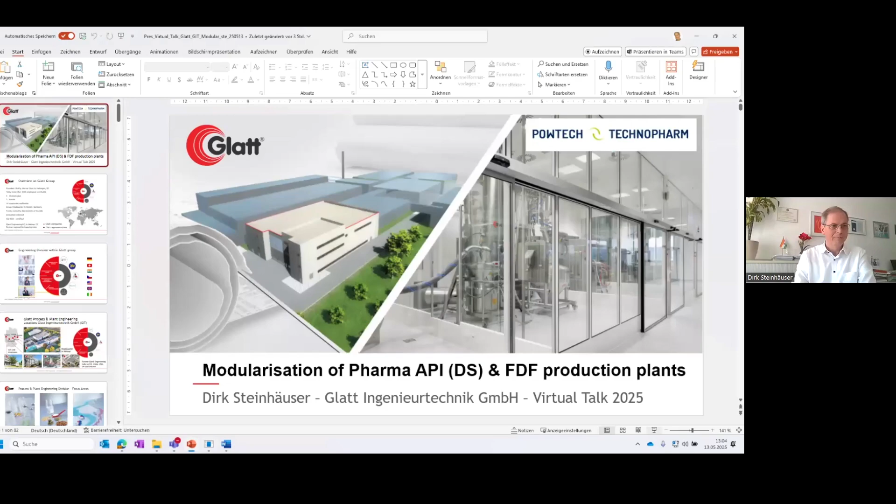Yes, my name is Dirk Steinhäuser. I'm Vice Head of the Dresden Engineering Hub of Glatt Engineering. I'm a process engineer by background, by profession, but I also have a scientific degree in biotechnology from a university in the UK.

First, I would like to give a short overview on Glatt Group and what we are doing. We are a group of about 3,000 people working in different companies in different countries and regions, and about 14 companies. We are from the engineering division, and our other divisions and branches are especially the equipment, but also pharmaceutical services for development and food, feed, fine chemicals.

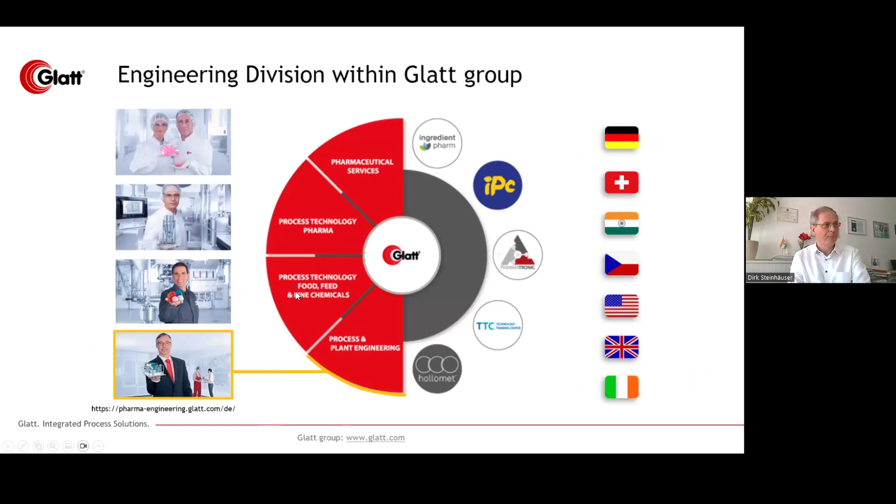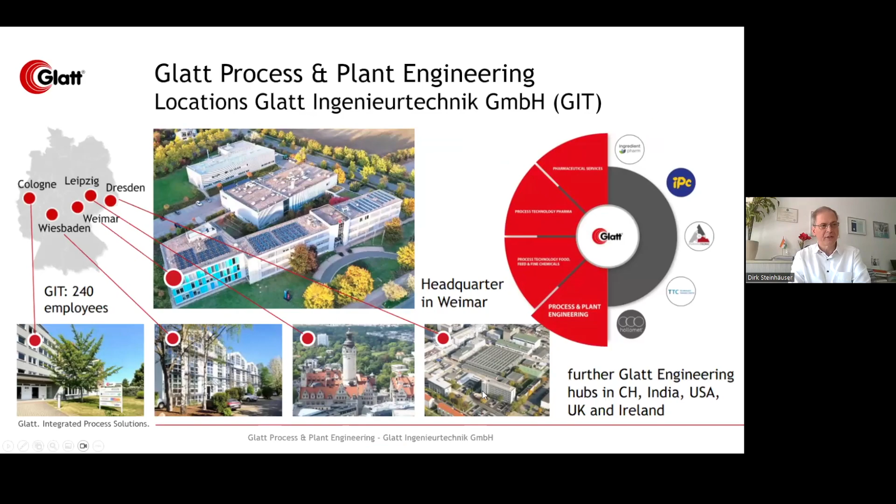From the engineering division here in Germany, we have a number of offices and hubs. The main hub is in Weimar, the headquarters, and I'm situated in the plant here in Dresden, in the office building where we have an engineering hub on the 5th floor. We are working on a number of topics in pharma, biotech, biopharma, as well as food, feed, fine chemicals, and also the chemical industry and certain fine chemicals.

Within pharma and bio, we are dealing of course with active substances, APIs, active pharmaceutical ingredients, both biotech and chemically, but also based on specialties or on special raw materials like blood plasma. And for the finished dosage forms, the FDF or the drug products, we are especially focused on solid dosage forms, but also liquid dosage forms, steriles, and certain specialties, medicinal products, applications, plasters, sprays, you name it. We have worked for a number of companies.

The approach that I'm going to show is derived and developed together with projects where we have developed and gained our experiences. Here are some examples. A company where we have done a lot of work is in Dessau, IDT Biologika. We have done projects for ATMPs, these are advanced therapy medicinal products, and vaccine projects here in Dresden for GSK.

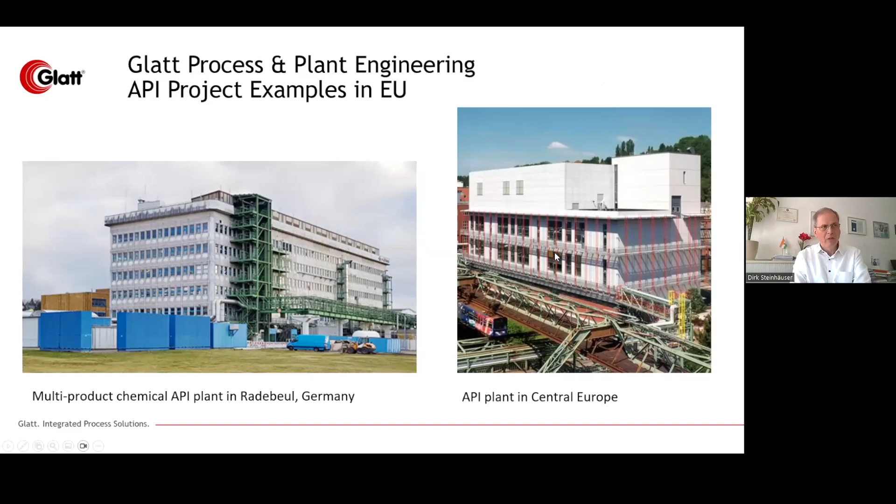But also API projects, for example, here in our valley of the River Elbe in Radebeul for Arevipharma, which was the former Hexal, now part of Yonsung Group from Korea. This is a plant in Germany, also an API plant with modular trains.

Sometimes the API plants have high requirements towards operator protection or product protection, so we apply containment. There are certain OEB, OEL definitions applied in the plants. And these kind of plants sometimes even are structured on the plant level into a modular approach.

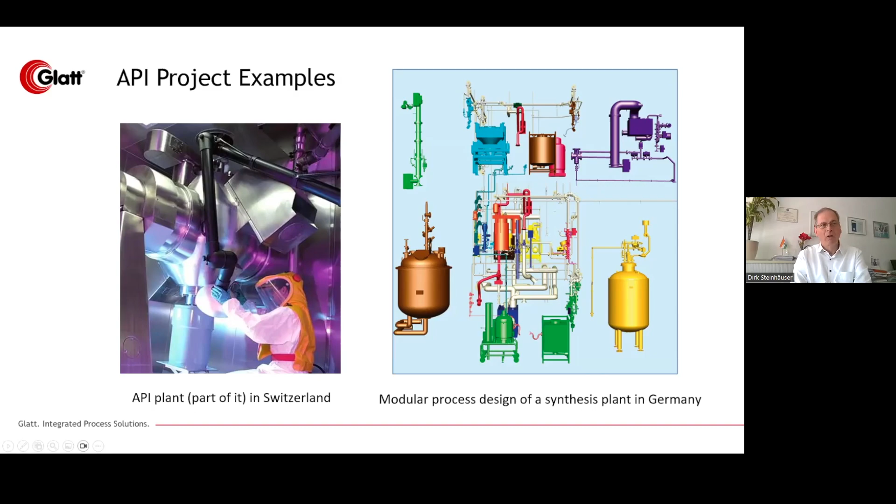So we have process flow diagrams and P&IDs for the different units of a complex plant step or plant unit, for example like a feeding station to a reactor, or condensers, or evaporators, or collection tanks. So all these kinds of process parts can be modularized.

Of course our travel was restricted, but the construction company was local, and it moved forward quickly. So already in '22, the building was constructed, and afterwards it started to fill in with equipment.

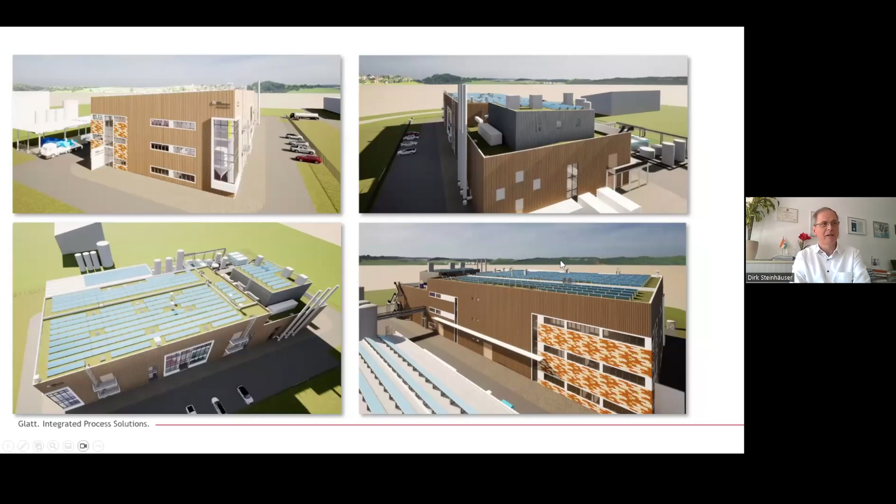Such a biotech campus, like here in Thailand, is also being built at the moment in Germany, in Straubing. This is an image of the conceptual design phase for the biocampus multipilot in Straubing, the ID phase, and then it was designed in concept and basic design. First equipment modeled in 3D, the piping, and then, of course, the building, the architecture, also with solar panels and some other sustainable energy modules.

And the first tool to coordinate these trades or disciplines is the layout, where everything comes together, because all of these disciplines have their space requirements.

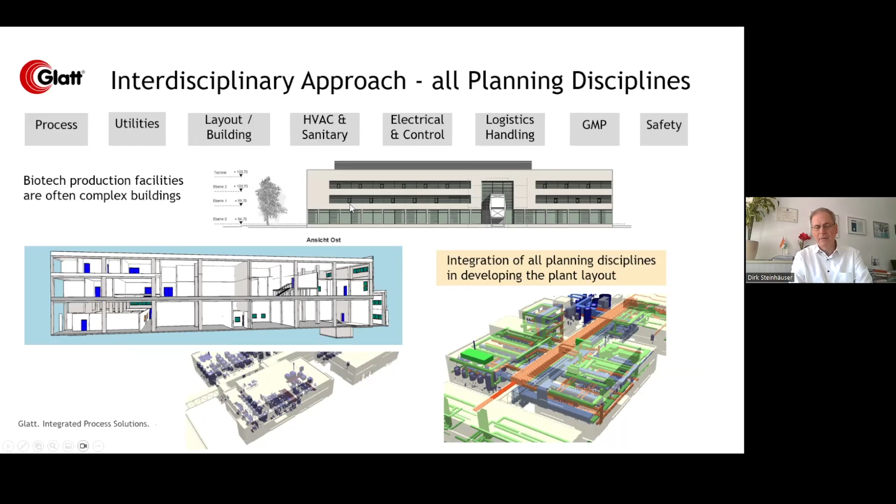And these projects go along in phases. Many of you know these project phases, like concept, basic, detail design, and then starting the procurement, and as soon as the building is constructed and equipment delivered, going further into construction management direction, and then the installation phase coming further to commissioning, and for pharma projects also qualification.

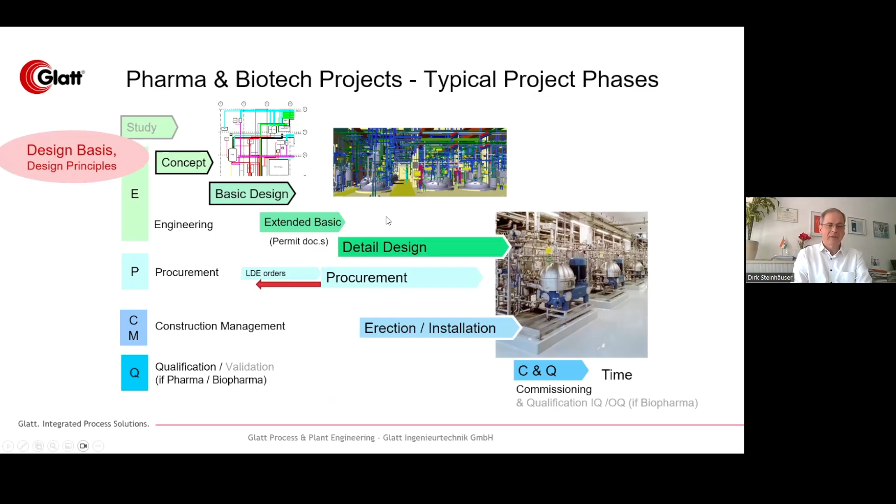However, the first starting point is always the design basis, the process or the process requirements, the defined process. And even if the process is defined, there are further design principles to be discussed, especially in the GMP pharma environment.

For example, the discussion, what is in a clean room, what is in a technical space, which classification of clean room is applied. So we discuss this very early, derive it from the GMP requirements, and then assign the classification to the function, and also discuss the function, collecting all these necessary steps, equipment, and support functions into a functional program. This is also the basis for the next step, which is later the room list.

And this is a method which comes from the ISPE organization. We didn't invent it, but we apply it a lot. And it helps also to structure a plan without a discussion of specific room sizes, because otherwise you end up in discussions about why is his room larger than mine, if it's an office or lab. And also the allocation of certain functions can be structured primarily based on technological aspects and GMP aspects.

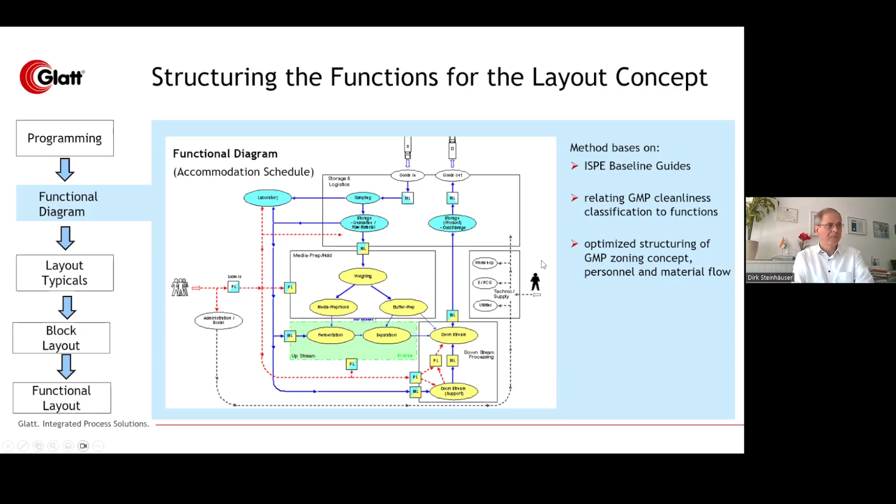With these functions, we also assign the necessary space for operation, maintenance, sampling, taking a sample, but also feeding of product or raw material, and the handling for that, like for example lifting devices, hoists, etc., heat exchangers, pumps. So all these units, all these systems require their space.

And so for a complex function, like this case, we have buffer prep and hold area, not only the two tanks, but also the periphery considered in the overall layout, typical, as we call it. So we have a library of all the functions we've come across, or that usually apply in such a project, and have them also in different volume or capacity ranges.

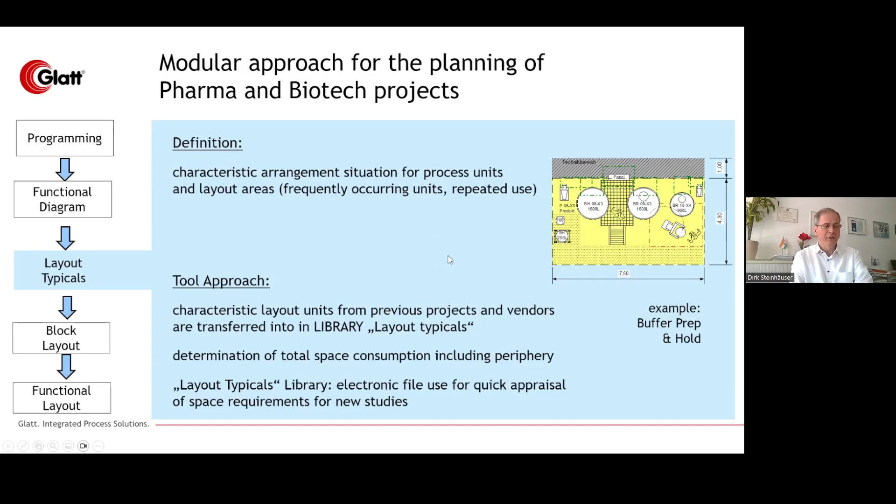With these blocks or ideal layouts, we can apply these for the different configurations of the layout. The first arrangement in horizontal and vertical way. Also, there's technical spaces, what are the spaces and the dimensions. This is still very conceptual, very preliminary, but it gives the first indication and a structure into the layout development.

With these blocks, behind that are the details. So this is a bit simplified, and behind there are the details. So it's really proven within the detailed drawing that these measurements are kind of realistic.

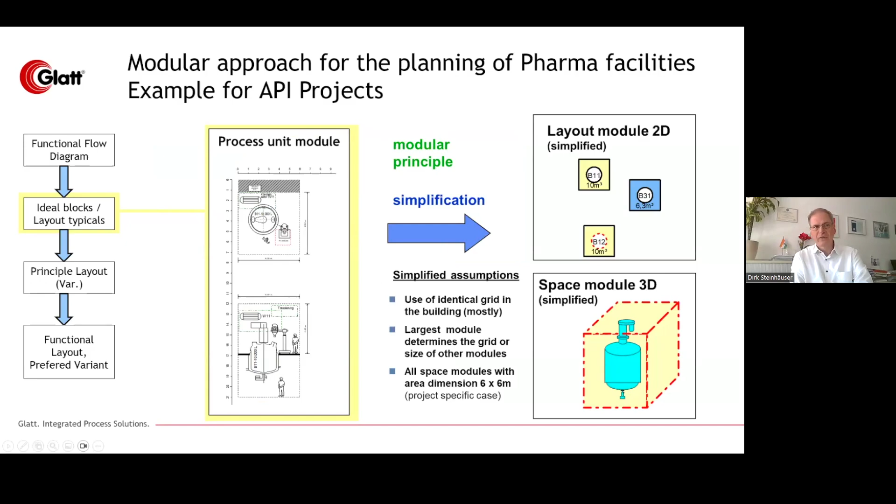We can apply these in layouts in a 2D plan like in Visio, but also have a simplified 3D model, a modular space module. So to have a structure, for example, for an API plant where we have technical spaces, where we have a kind of middle corridor for some functional units. This might be open space, but you have certain reactors left and right-hand side, and this can be accessed, and then cooling or heating media can be connected to the technical shaft or area.

And with these kind of cubes, it can be played around with or structured in the way like it is symbolized here, even if there are questions like free modules or modules for extension.

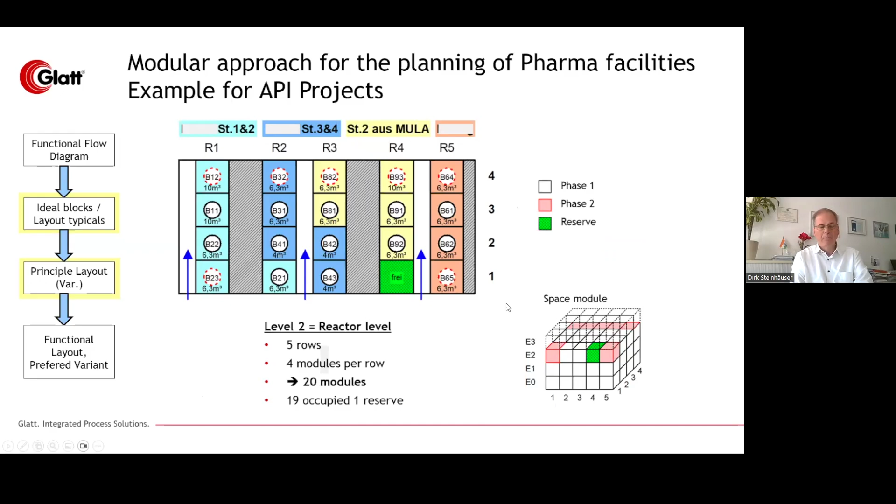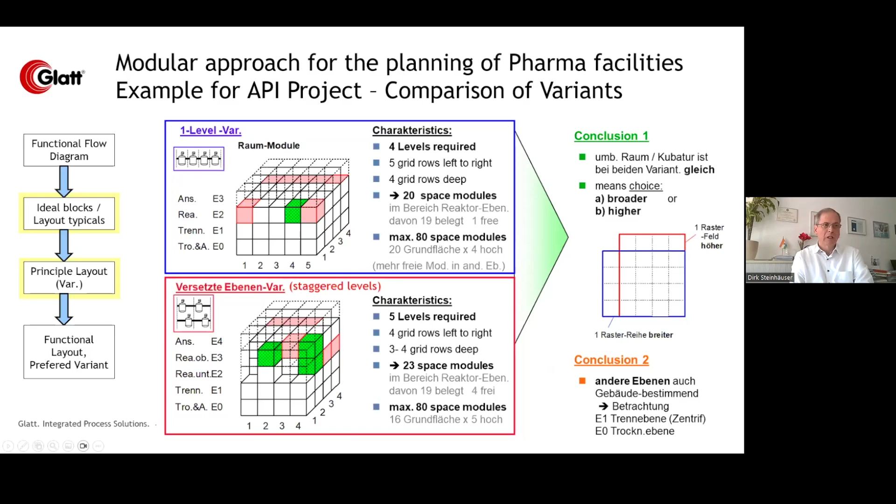It gives a good tool set to discuss and develop arrangement levels, like how many floor levels, how many grid levels in the horizontal perspective. And then we can also compare variants where we have different configurations, a staggered approach, or one main reactor level. And if you have to consider certain requirements or constraints from the construction or from the land plot, then we can also model these or play around with the different variants.

Then this goes further into a layout section, first a block layout section. Here we see already the different levels of an API plant. Above there might be some ventilation technology, even purification or recovery. And then some process feeding, the reactor level already in a different clean room classification, going down further into separation of crystals, and then drying and, for example, filling or feeding of containers for further bulk processing or storage.

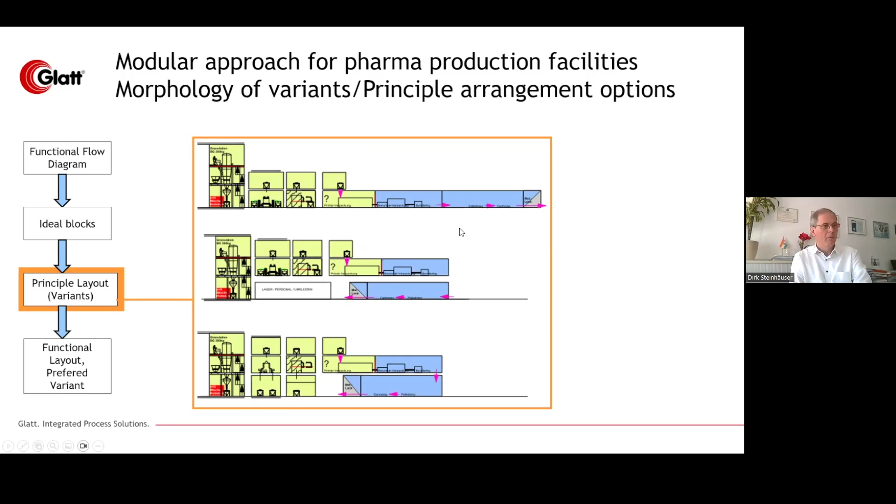In oral solid dosage forms, here we see a granulator type in a vertical arrangement, and then the following steps like tabletting, sometimes coating of tablets, packaging, and then secondary packaging, which is the cartoning. And the different scenarios can be modeled, and advantages and disadvantages can be discussed using this approach. This will be detailed out further from the principal layout into a functional layout.

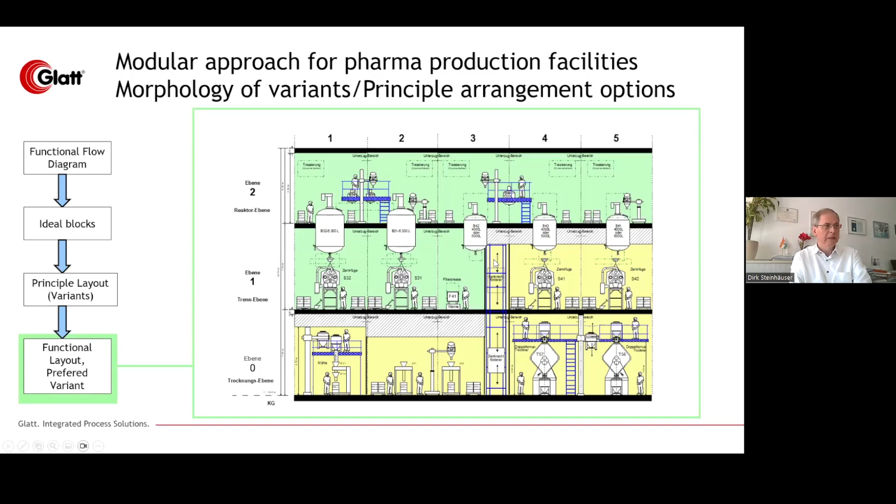So we see these more detailed drawings. This already can be at the end of the concept design. And just to indicate the depth of the equipment, we have certain filter centrifuges or double cone dryers here in vertical, but also in the horizontal perspective.

For OSDs, we have also developed train concepts that go beyond one module, considering the neighboring modules like dispensing or tableting, and even further to packaging. This is an example of a one product dedicated line, so straight one line for one product. However, there are other train concepts combining two trains into a hybrid train, so we can have more than one product.

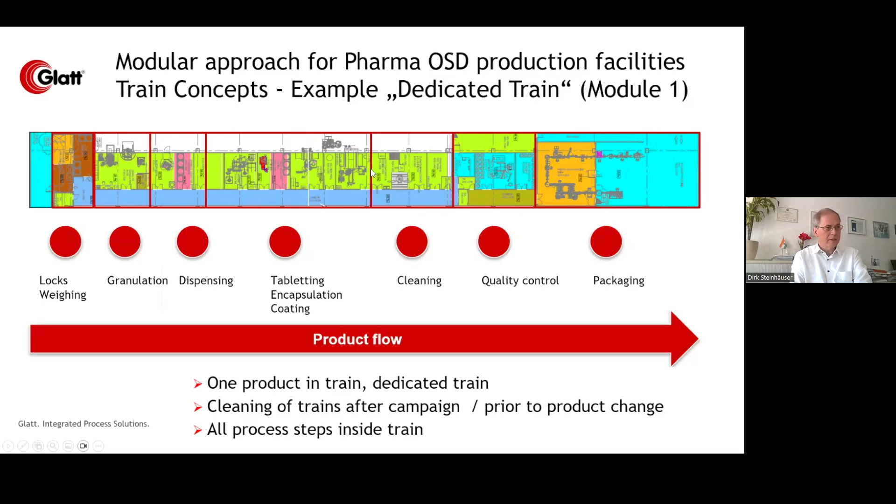At the same time, we can use the different stations in a workshop principle, going to the station. And for a mono plant, of course, this is the preferred way for one product, or if you are in campaign operation mode, changing after a few days or weeks, then do proper cleaning and go there with the next product. You can run more products at the same time. And there are combinations of up to 5 train concepts we have developed and are using.

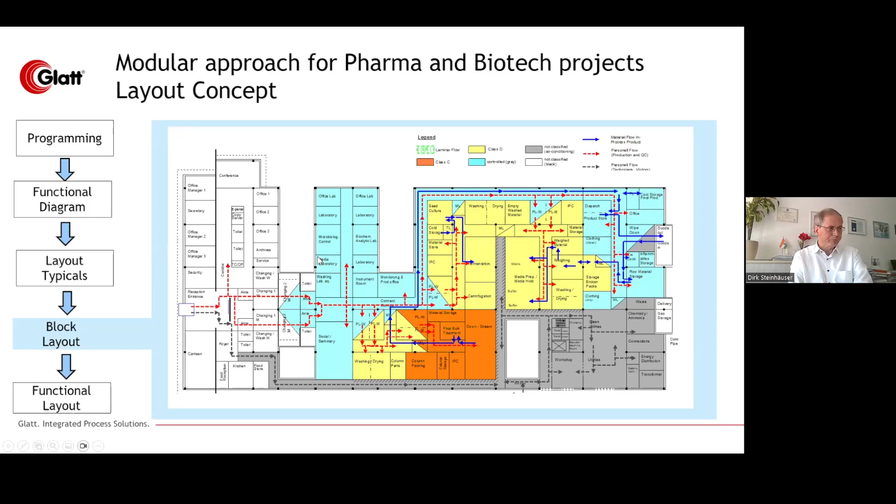These train modules are all combined together in block layouts. Here without equipment shown, but behind is the equipment information from the modules in more depth. So there is a safe space estimate underlying this design concept. Nowadays, luckily, in the past 5 or 6 years, the equipment suppliers also provide us with 3D models of their equipment. So we're getting such 3D models from nice companies like Pall or Millipore or Sartorius. And of course, we have a high planning certainty for the layout design when we receive such models, and we are quite realistic about the final selection by the customer for the project.

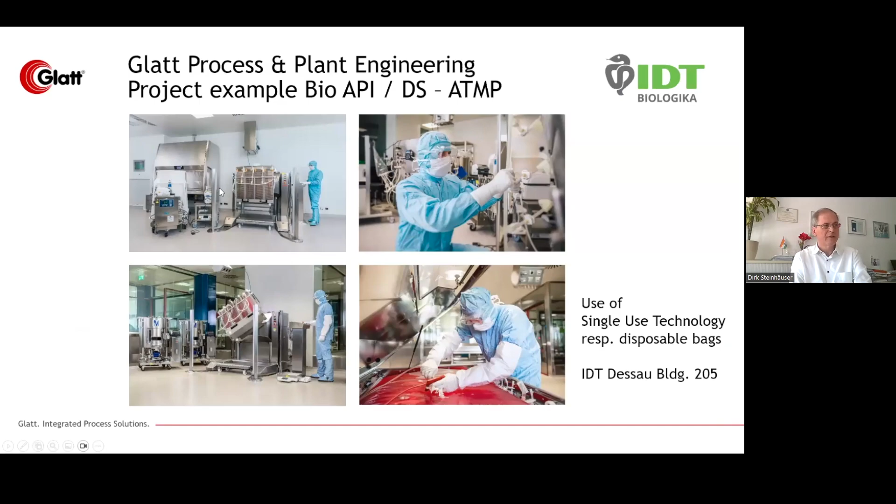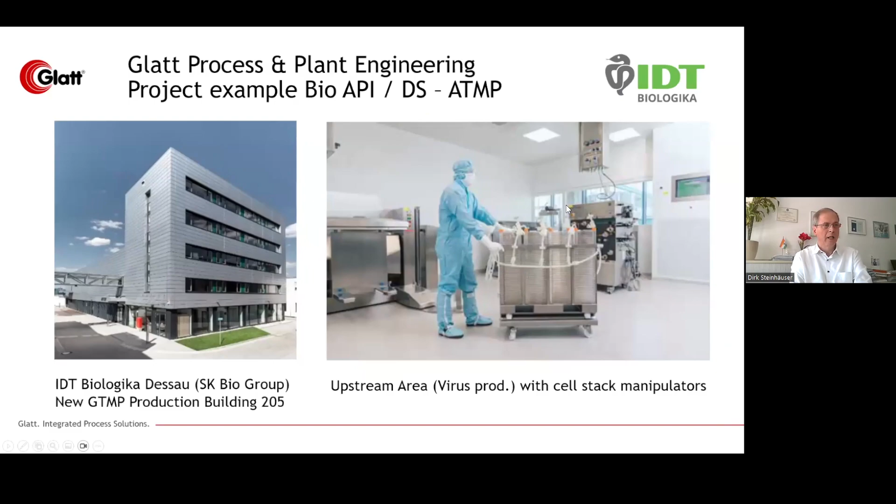And here are some examples of single-use technology in a fermentation plant, in the model and in reality, in this case a project case study from IDT Biologika in Dessau, where we have special equipment like cell stack manipulators applied. Utilities are supplied from above to the mobile units, quite flexible. It's a building concept developed together with an architect partner, PBM Group from Leipzig.

We have flexibility within these main production compartments, 1, 2, 3, 4. Each one has its own personnel and material airlocks, so there can be different products in the modules. Usually 1 or 2 of the modules are applied for upstream and the others for downstream, and different classification is possible. Of course, the final step is mostly the higher classification. Depending very much on the organism or the process, it doesn't necessarily mean that we have to run them in class B, but it is designed to be able to have class B. That is the darker blue color here.

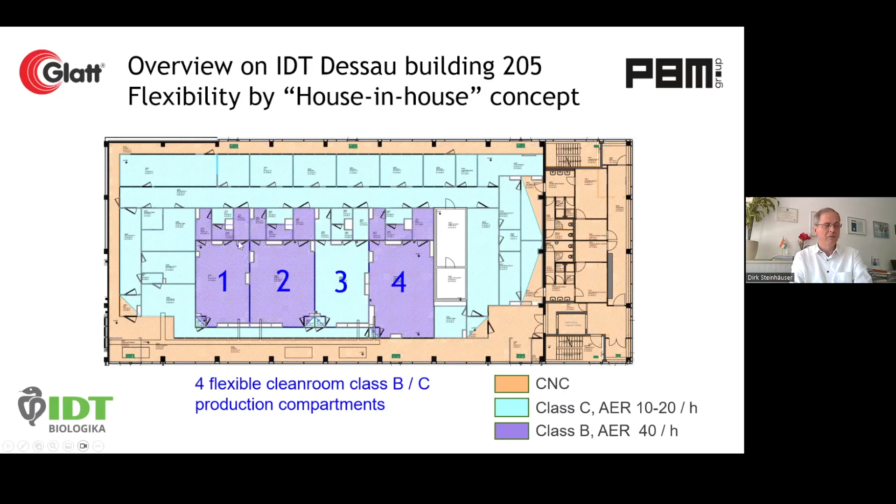There's a second level of flexibility: even if we apply different products to the production modules, the whole floor can be changed. In the clean room part, the clean rooms can easily be changed because the building structure is not affected; it's independent, a wide span structural unit. Air handling units are on this technical level, can be repositioned and moved easily, and give another level of flexibility to the plant. IDT is a contract manufacturer, so they quite often face a change of customers for whom they are contract developing or contract manufacturing. So this customer is provided with such flexibility for their plant.

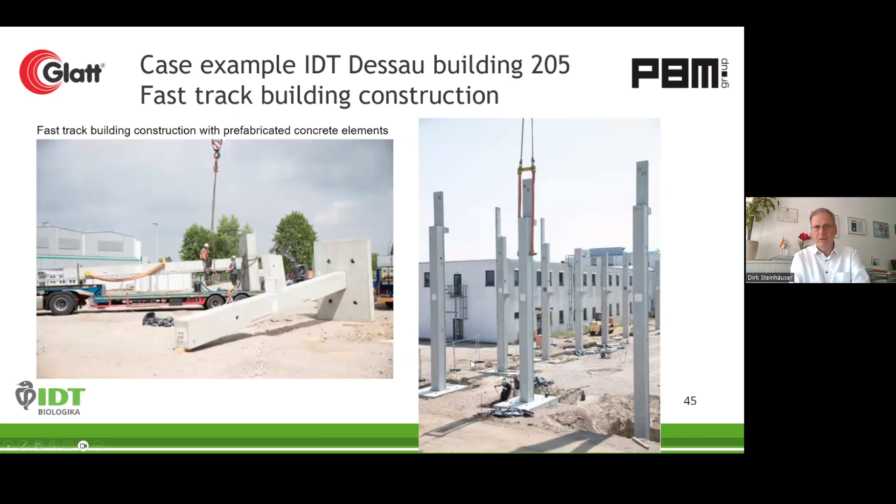And oftentimes it is of major importance. This is from this IDT project with a fast track approach. That means in this case a lot of prefabrication of columns and slabs. So these are delivered, prefabricated, and within hours erected into a vertical position. And within 2 days, the whole building more or less was ready.

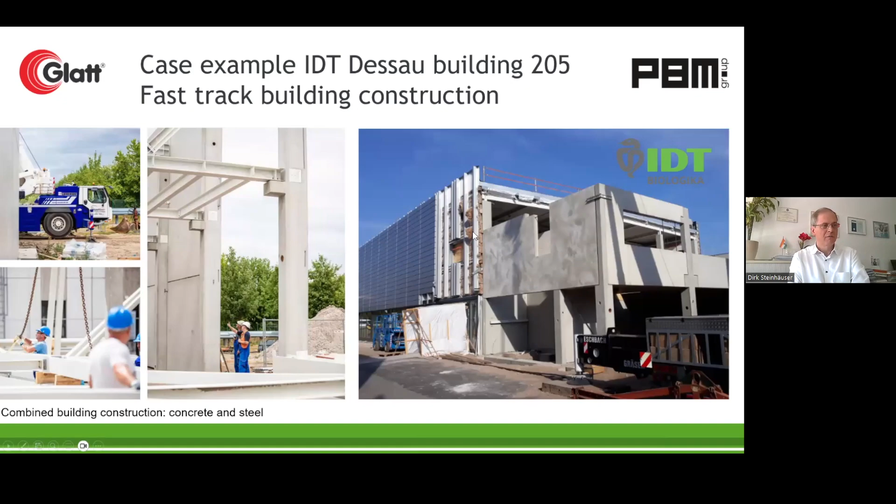And then here in the rear part already the facade is installed or attached. And then the front part is still the raw construction. So that is very fast building. And here is including the levels which are partly steel construction. And then already starting the work for the clean room ceilings and the clean room floors.

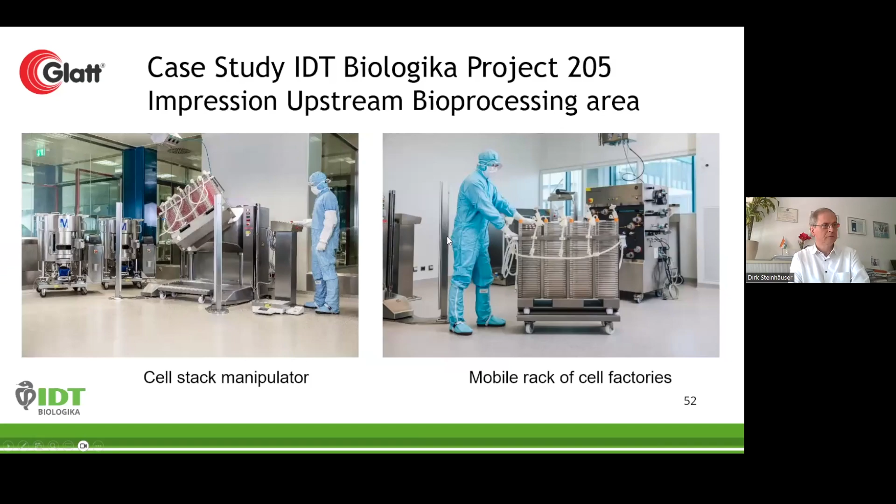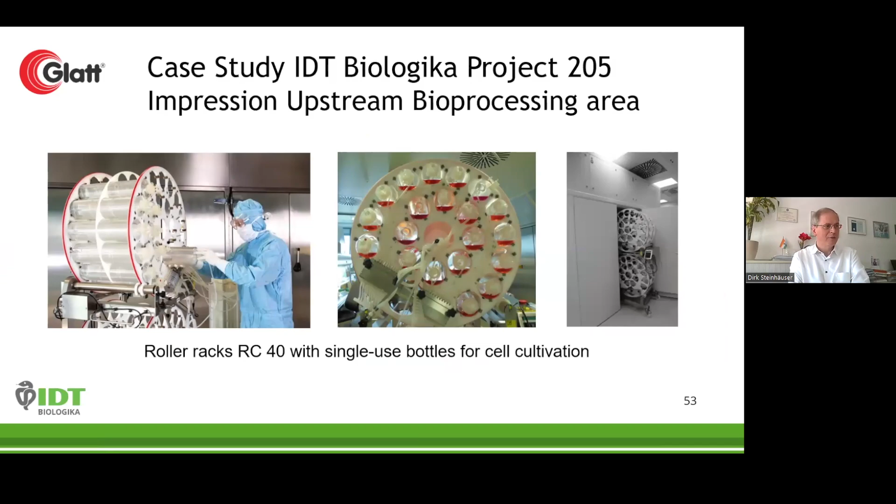HVAC level in this flexible structure that I've shown before. And then after that's prepared, then soon the equipment can be moved in. Yeah, and we have also very nice equipment like these roller racks here for the cultivation of virus cells.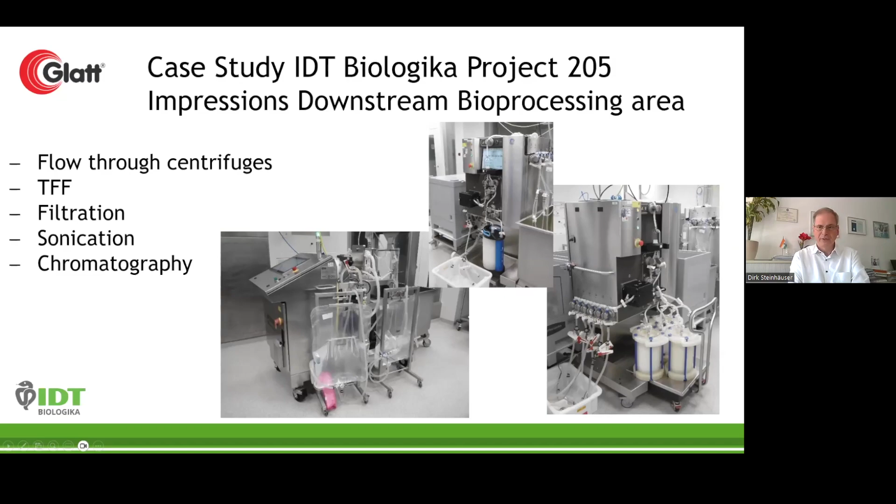Single use, not only for chromatography fluids like buffers or certain eluate containers, but also chromatography columns in single-use manner. One has to be a little bit careful when handling these. Sometimes there are probes and certain small pieces that are kind of measurement devices that are not single-use. So be careful when putting everything to the autoclave. Afterwards, they might be dead. So a very good training is essential to use these tools here.

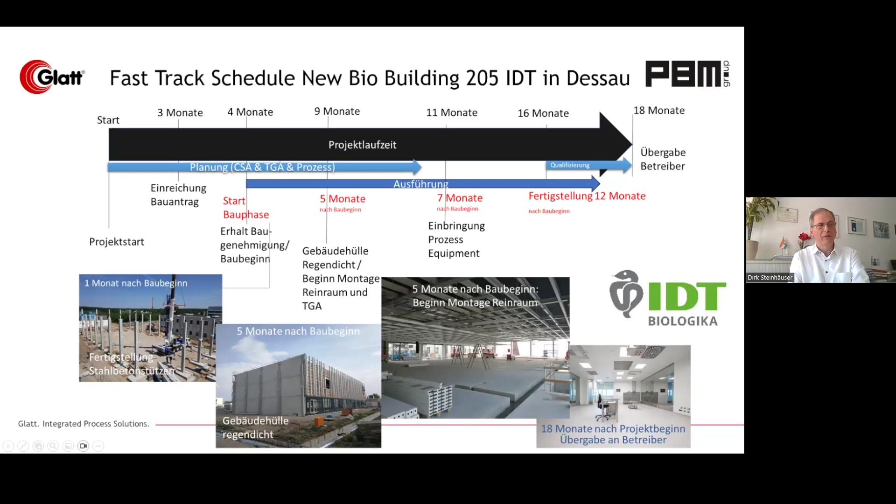The main structure was there, and the building was closed, and then the clean room installation started immediately. So overall, the building construction time was like 12 months, and the overall time until end of the qualification, end of OQ, was 18 months, 1.5 years.

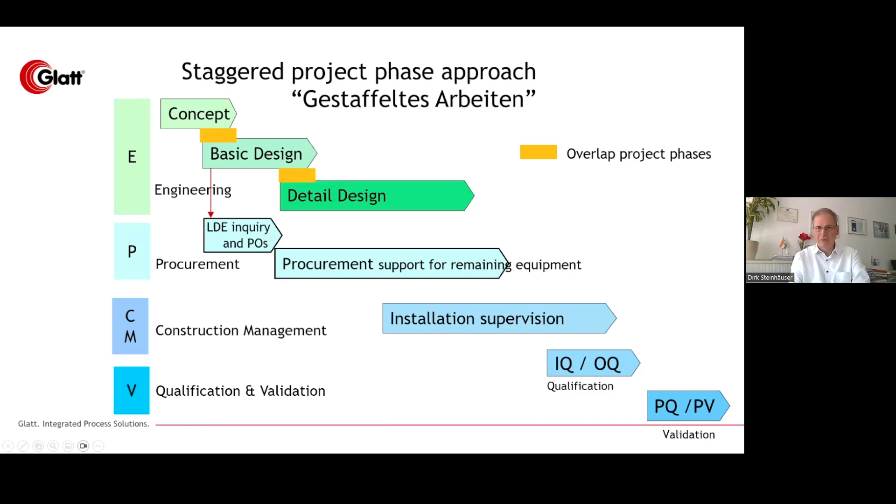For this kind of approach, it's crucial to allow an overlap of phases or a staggered approach, and further also to use the time, at little risk, to already do design work or prepare tender documents during the detail engineering, or while the authorities are checking, to use that time for continuing with the project, not just await the decision on the permit, just to continue.

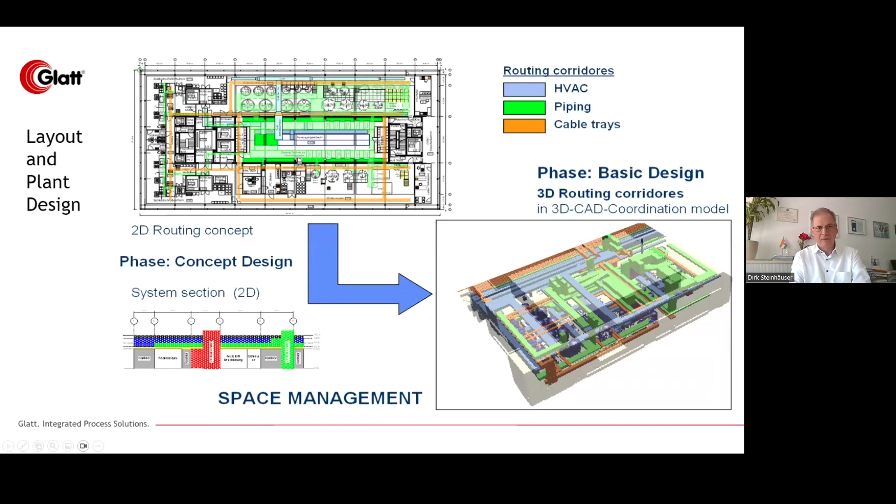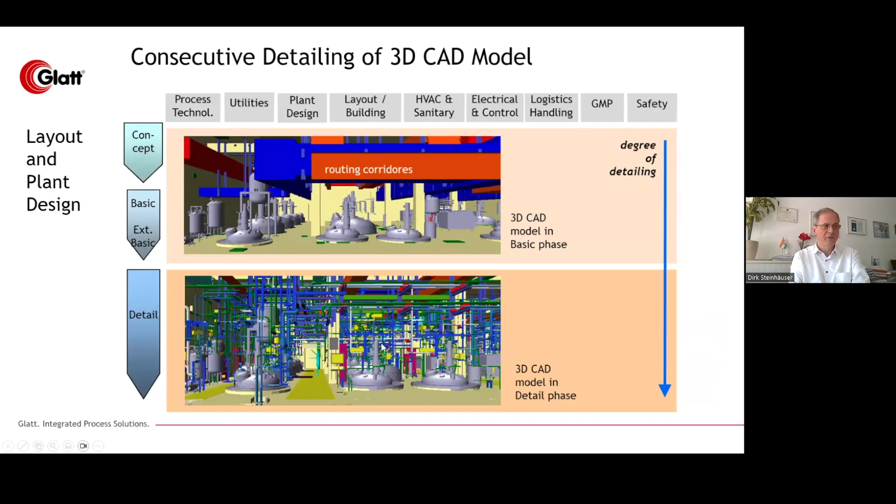Going further in the coordination in 3D from the concept with tools that we have in the basic design, usually Revit for HVAC and the main piping, and then going from basic design, from routing corridors, space reserves, into the detailed engineering, each pipe support, insulation, and further details, instruments, valves, everything. And then the overall plant is kind of designed.

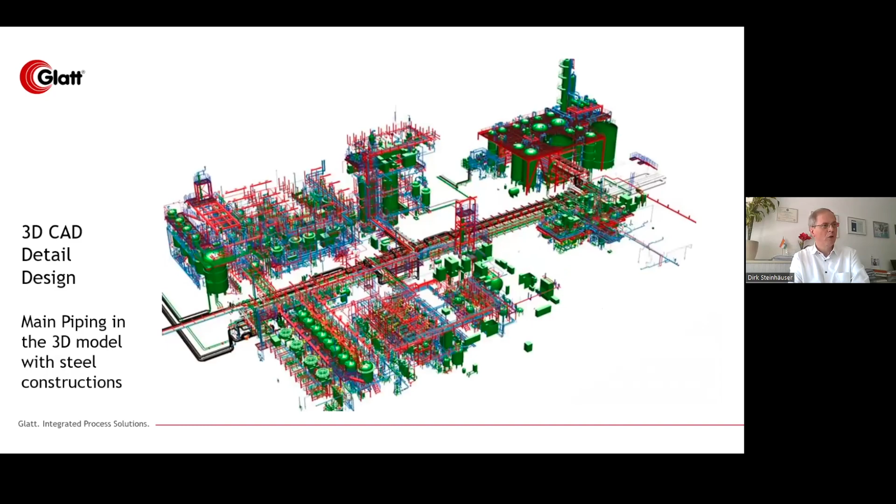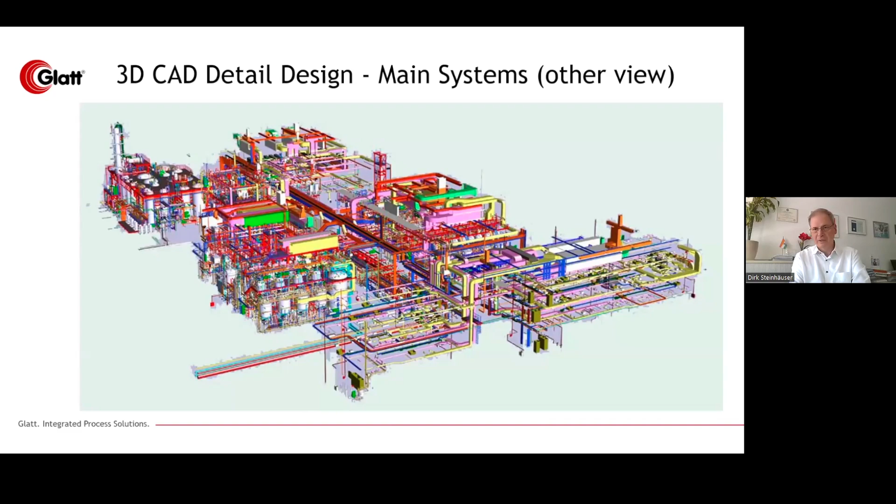So it is quite a task for coordination, and nowadays that's only done in a 3D model. Otherwise, to do that on the side would be time consuming and risk a lot of errors. Yeah, the Autodesk product group, AutoCAD and Revit, is the main tool platform we are using, but we have used also other tools. But in the last years, Revit has become more and more the tool of choice, also for customers or partners in building design and building construction.

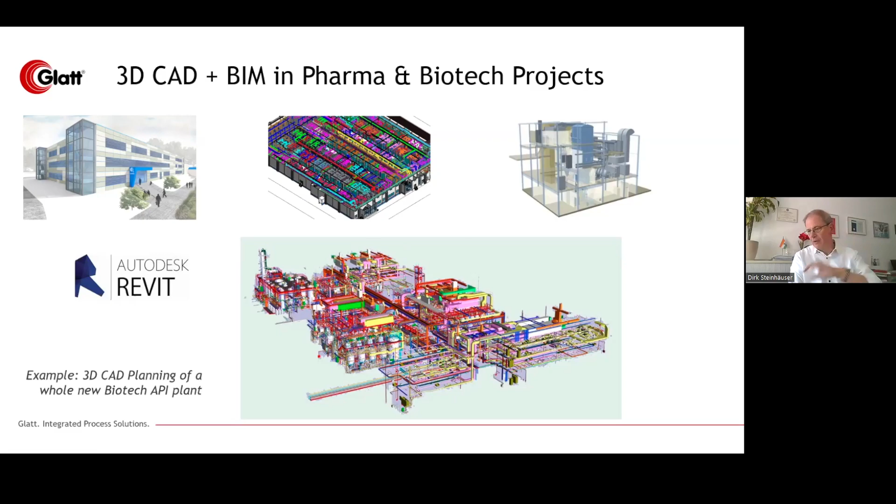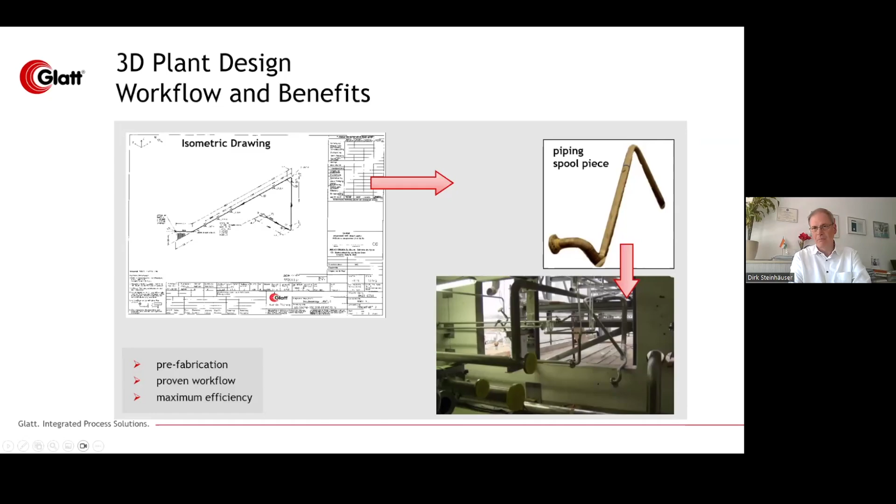And the MEP, in German TGA, for process, we to some extent use AutoCAD Plant 3D because of certain features we use for sloping and isometric drawings we generate from the model, material takeoff, material lists, etc., which go directly to prefabrication of spool pieces, and then these are labeled, and the operator or installation worker can take it on the shoulder, bring it to the right position. So it's a bit like Lego, putting it into place, and then the plant is ready.

This is from the biotech plant in Germany, which has about 100,000 liters capacity for the fermenter and the whole tank. And here we have a larger plant in India. That's an E. coli plant on the left side, India. That's a yeast plant, yeast-based fermentation with 350,000 liters. In this case, also the fermenters were built by Glatt, our colleagues in India, workshop in Pune.

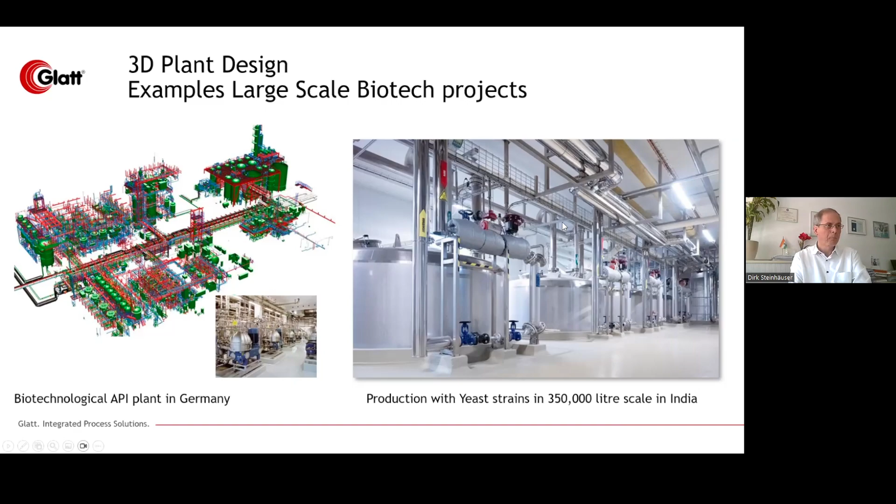And behind that approach is the interdisciplinary phase model, where we have the different disciplines. All the workflow is defined, the process, the sequence of the events, so that nobody is forgotten. The space requirements of every discipline are considered, respected, and integrated.

And for the modular approach, we have here the levels. Level 1, the base level, is the single individual equipment. Combining functions brings us to level 2, a complex functional unit, where we have a granulation function, not only with the granulator, but all its periphery. And we have level 3, where such functional units are combined into a larger functional area, a complete tabletting area or complete OSD area.

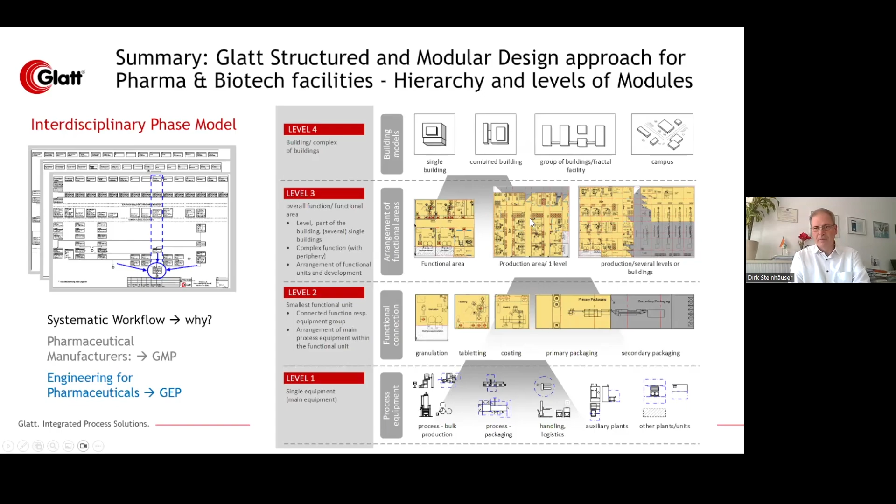And these functions can be combined into different building configurations, often together with an architect for the specific site and land plot, or if it's an existing plant, to the constraints and conditions there. For the modular approach, there is a method from Dechema, VDI, GVC, a German organization. There's a white paper. We have been actively using that and contributing here.

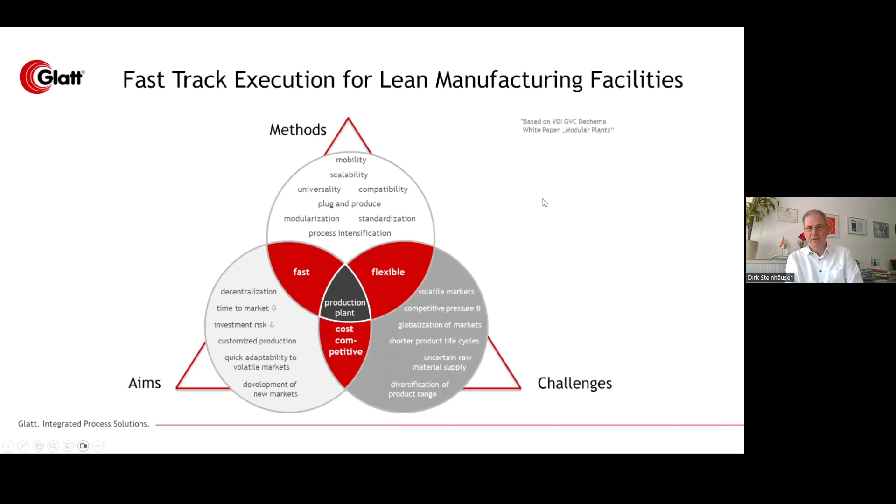So there is a method, and often it's this combination of being flexible, cost competitive and fast, and a number of aspects play a role, like time to market, being fast, being flexible, plug and produce, exchange, having new products. So all this together shall be considered. And with the modular approach, it's much easier because you can change a module or update a process rather easily.

Just a few conclusions coming from the requirements. There are a lot of product changes after the pandemic. There was the trend of anti-obesity drugs, or still is. There is advanced therapy, personalized medicine, new peptides, oligonucleotides. All these products want to be installed, and sometimes our customers, contract manufacturers or pharmaceutical companies, change often, have new technologies, new products, go to different regions, sometimes leave a region for cost or market strategy reasons.

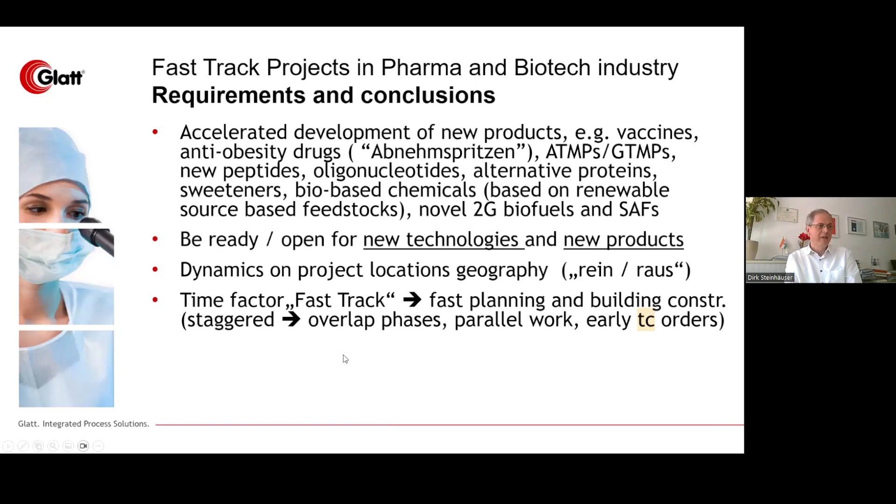And we have to follow that and act flexibly and quickly, and also order equipment quickly. But nowadays, it's not just equipment which has long delivery times. Sometimes there are so-called time-critical orders, even transformers or certain valves with special metals or alloys. And all this needs to be considered, as well as the cost aspect.

We try to involve, if it's necessary or recommendable, our engineering partner, Glatt India Engineering in Pune, and a lot in 3D tools, but now 3D becomes more and more BIM, building information modeling. We are using AI in certain projects. We apply robots in production, but also in manufacturing of equipment and skids. So this is the situation.

The biologization of products is coming. Less and less chemical APIs, although they will remain. There are always a lot of new biological products, and everything is now data covered. A lot of data are collected and generated. So all these famous words, big data, AI, are our reality, with the pharmaceutical dosage forms, with the registration, with the project, with the digital twin of the whole plant.

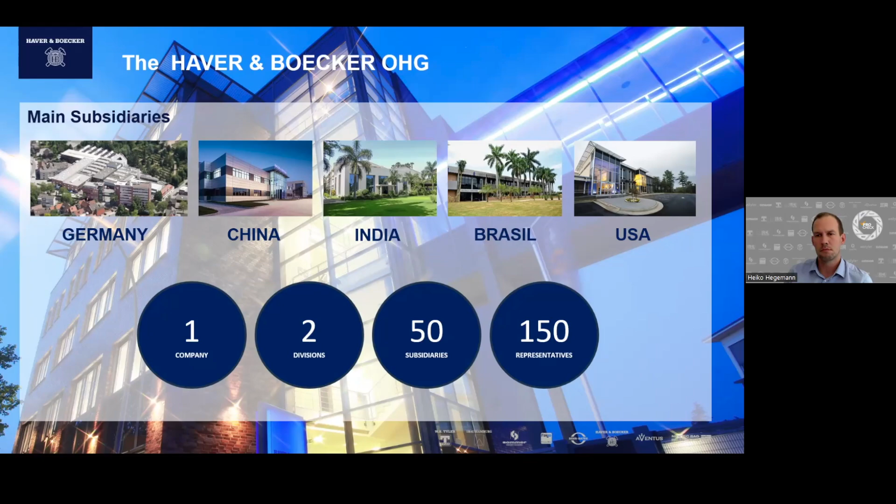So how do we do that? How do we listen to the customers? It's our aim to truly understand them in order to be able to advise and to supply them in the best way. Therefore, we developed the project cycle. That project cycle is based on 8 different segments, and these 8 different segments are used to cover all of the customer topics and answers. Today I've picked 3 of them to explain them more in detail and to show you this procedure.

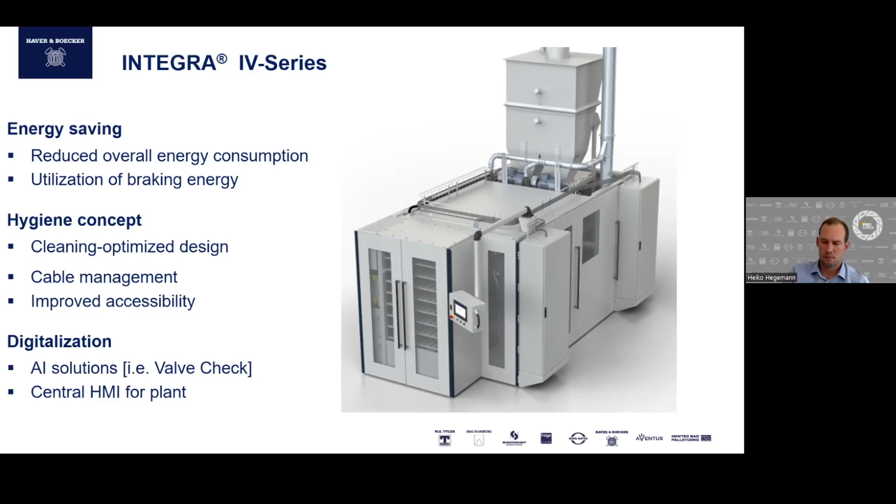Also a modular item, the new Amicus robot. Modularity in the way that we have multiple tools and different tasks for the same robot. So we are coming from the empty bag up to the palletized pallet of filled bags. The same robot could either handle the empty bags to load them into such a bagging machine or receive the filled bags, for example the 25 kg cement bags you know from the Home Depot, to palletize them on a wooden pallet. Therefore, we have different tools. It's the modularity to choose them according to your specification and your needs.

In the same way, we have the digitalization in that we use AI solutions as a bag check. These empty bags are mostly pre-printed with a product name, and the solution could help us avoid an operator loading the wrong bag for the different material.

Same here, we have the centralized HMI. You could choose where you would like to control your line or your plant and have there the accessibility to all of the different segments.

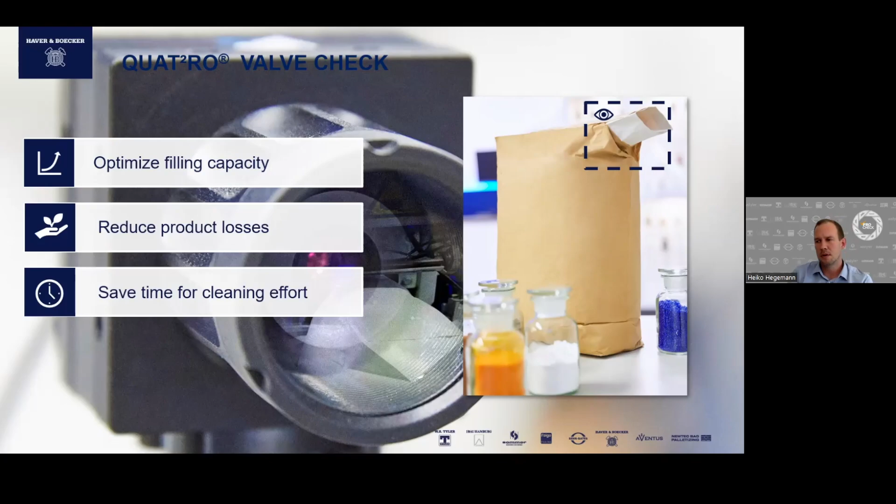This, as a benefit, optimizes the filling capacity. No operator intervention is needed. We have a reduction of product losses, because if the bag is slightly misplaced, the filling could still start and we have a kind of mess inside the machine. But with this solution, we completely avoid such a thing, which ends up saving time for cleaning effort and also saves time for the operator.

Second thing we have for the Amicus robot is the QUAT²RO bag check. See here in the picture such a bag - the AI camera will recognize the imprint of the bag and compare it with the given example print, informing the operator if this is not the correct bag for the product you would like to produce.

This saves time and minimizes the risk of any claims from end customers. We have reliability because we are not using the wrong bag instead of the correct one in the first approach.

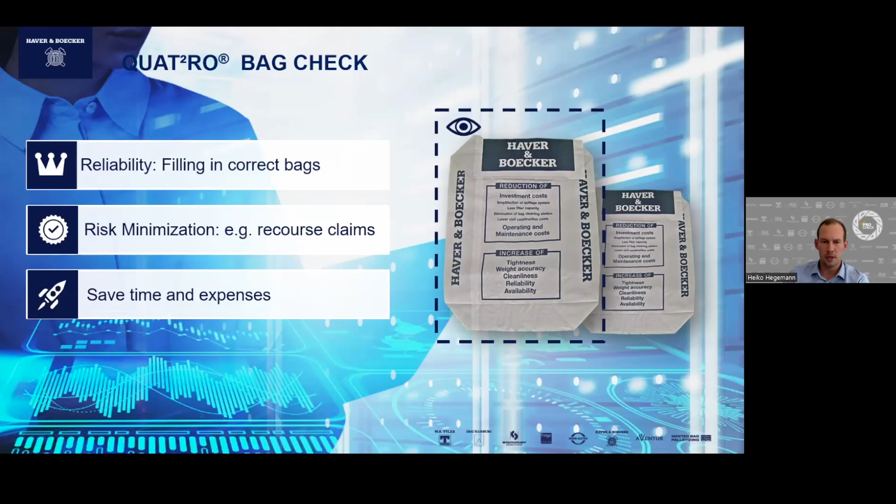Third segment, the plants and systems. It's the topic of combining the single machines, the single solutions, into one complete solution for your requirement. Now we have single modules, and these single modules could be combined to have the final product. This project segment is used to get a holistic solution for your business.

How do we do that? We have different QUAT²RO products. QUAT²RO is our digitalization branch, the family of all these digital versions to optimize your plant. We will get back to that later.

Mostly the big question is how you have a standardized, but still modular, approach to combine all of these steps. How is the paperwork done with the customers together to select from the prepared solutions and get them into a kind of order, a package which is needed by the customer. For this, we use our CTO system.

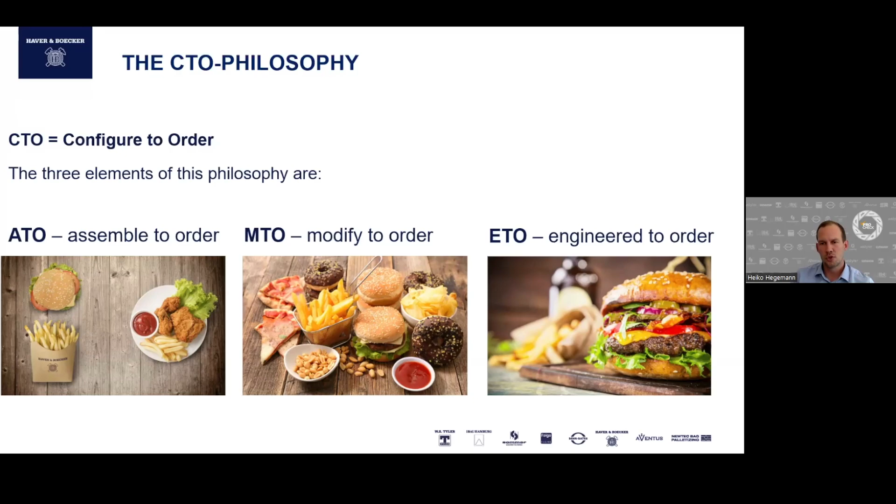How to integrate that? It's always the topic, the aim, talking about Industry 4.0, digitalization or automation, how to really execute this, and how to make all the information, all the data, available at the right point.

For this, I would show you what we have here before. On the right-hand side, we see our Integra bagging machine. This one is producing, for example, 25 kilogram paper bags. They are moved out onto a belt checkweigher. We have here a metal detector to detect if there is any kind of metal inside the bag, a printing engine to print on the bags, and our robot cell, the Amicus, to get the bags palletized on the pallet.

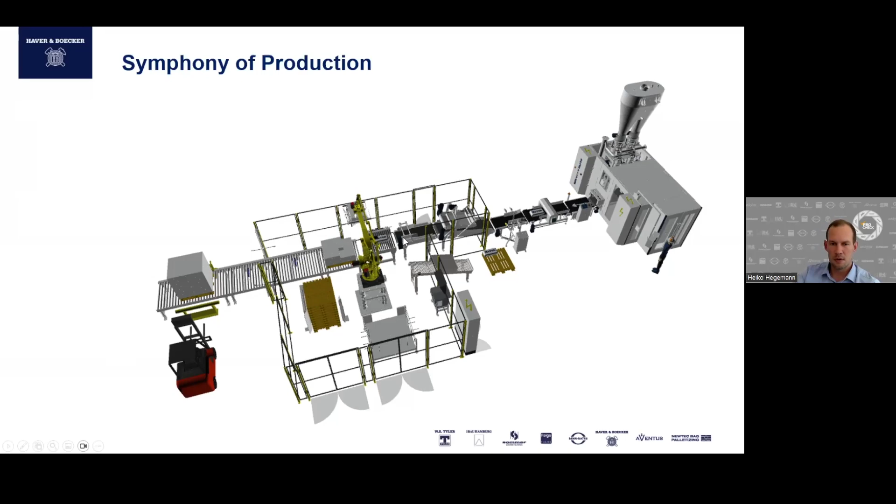The integration, first of all, for us is to use the H&B machine network to get the necessary information to fulfill the first phase, to have a productive plant together. Therefore, we have our main switch cabinet to do the distribution and to do more or less the central station to combine all of this information.

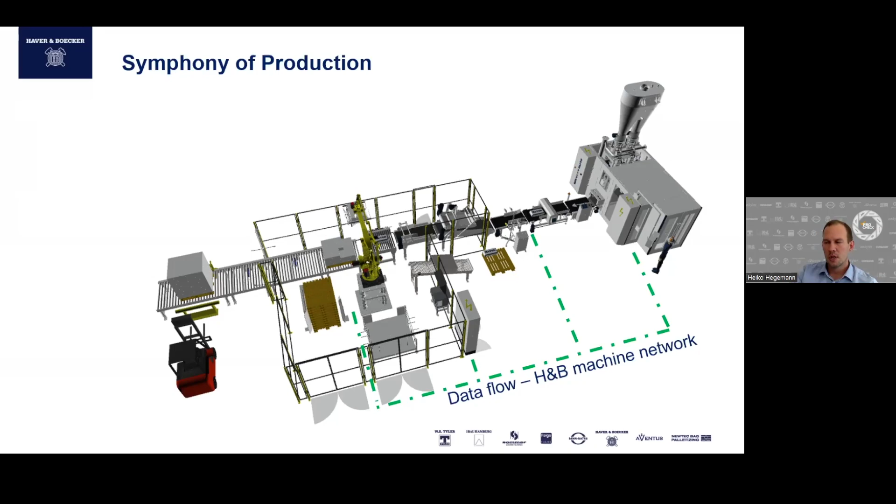Now we would like to add some of our QUAT²RO product family products. Then we do a composition of the local network along with the control network. That control network allows us to have access to the centralized station where the information is gathered, to collect them.

And to make them usable in our QUAT²RO products. By doing this, to have access to the centralized information, we could also use mobile devices or any kind of input devices to allow the operators to always have insight or to have a look on the dashboards to see what's happening in this plant.

But not limited to the operators, it's also available for your customer ERP system to do the backup functionality, to do statistics or reports for the sales and for the production management.

As an example, I would like to show you the QUAT²RO Connect. That QUAT²RO Connect is a centralized platform to gather all the information from the centralized switch cabinet which we have seen before and to make it available for everybody, mainly with a focus on KPIs and to see the data and figures of a plant.

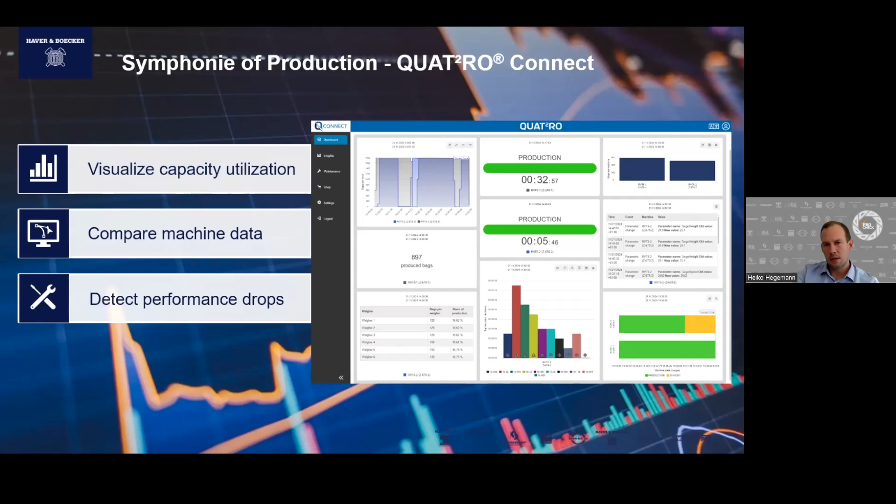Secondly, a product called QUAT²RO Visualization, and the aim is to have a different point of view, a different angle on the data. The management would like to see different things from their production plants than the maintenance people, and that tool is more for the maintenance and operator people.

They have here the possibility to have the whole plant on one screen, to do the operation, to do the control purpose, but also to change the local parameters instead of moving to that machine and doing it locally at each equipment.

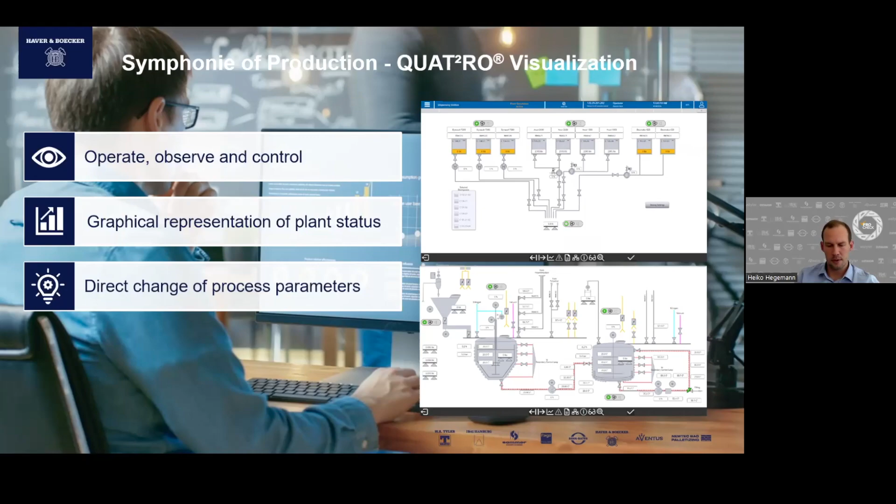Talking about how to track and trace products, even or mostly or mainly in the chemical and food industry, it's very important to have a complete reporting possibility to see when the products are produced, what the parameters are, how they are produced, what the production parameters are, like if it's metal containing, what was the check weight, and was it printed?

And all of this could be combined in a different product. It's the QUAT²RO Production. This QUAT²RO Production brings us the benefit of integrating all of this in one single solution.

Along with that, we have also the option to do an automatic presetting, meaning we have a full flow of information coming from your ERP system, like an order that could be uploaded into that station, and the station will do the necessary tasks to distribute that to your complete production line and handle the production information, what needs to be produced, what the bag, for example, has to be used for, the bag check, and how many bags you would like to produce.

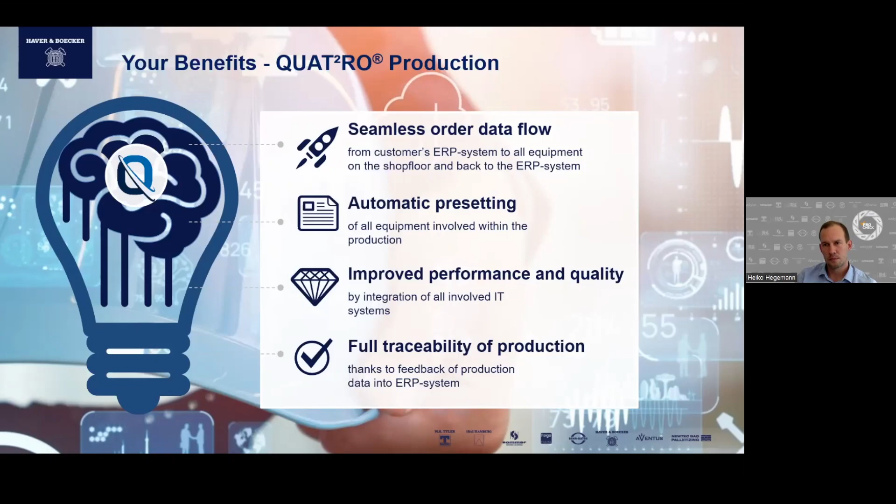So coming to the end, for H&B, the mission is to increase efficiency and innovation through digitalization, and to allow a responsible way of handling resources with our AI approach. Your benefit is to gain a competitive advantage with our digital solutions.

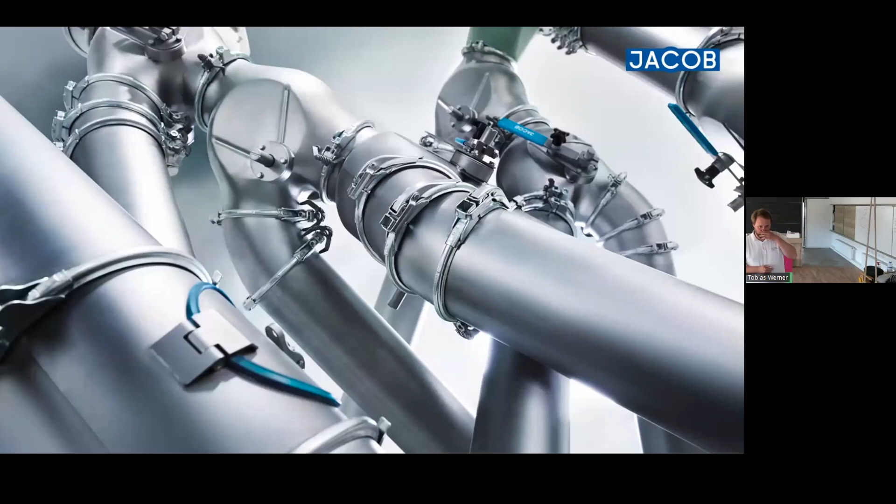You see a stock image of our pipings, but the fields we are working in are mainly bulk material handling. For example, coffee beans, dust and air ducting, low pressure transportation, which is pretty interesting because a bag of chips will be transported through the pipe system in low pressure. We also have a lot of custom applications, like standalone air filtration, for example.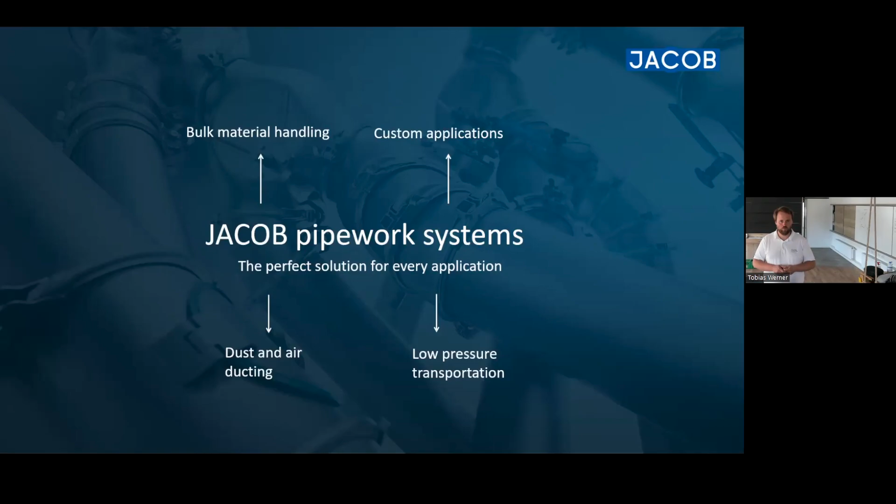That's shortly our company, what we do, what we're good at, and what we're heading to, set by one of our company principles, which is we leverage digital technologies to make the life of our customer easier. Before we talk about what we make easier with what I want to present today, we have to take a look at what is not so easy today, or what takes long today.

That's the process of planning pipeworks in a brownfield approach. For example, for an existing production hall, you want to move machinery, you need to replan the pipe system, you want to add a new machine, and you have to do it all while the rest of the production is still running, and you have to consider everything that is already there. So this is the field we are looking into today.

To tell you what that means, if you don't know it, let's take a look at the current process. It roughly takes 9 days to do a smaller to mid-sized pipe planning in the brownfield approach. And these numbers are positive numbers, so sometimes it takes way longer.

The steps you have today are: you still have to go on site, take a look where you are, and do some measurements, especially if there are no drawings available. So you can use a 3D laser scanner, or do it analog with a laser pointer or a meter stick or something. Then you have to digitalize the measurement.

For example, taking this 3D laser scan and transferring it to a CAD system, which can take up to 2 days, maybe even longer depending on how big the data is. And then after all that, you can start doing the actual planning.

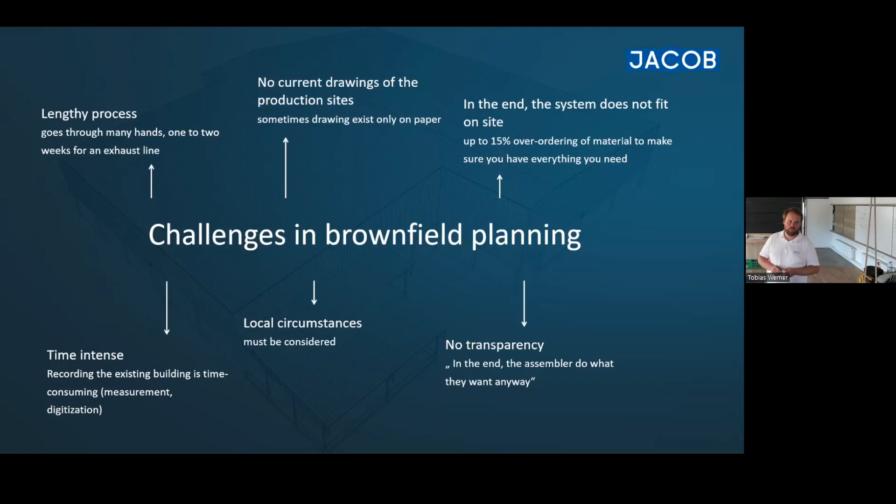And as our principle, we from Jacob said, let's do it differently. Let's try a different approach. And for that, we built software on a device, and we called it the Pipe Planner. With that, we can do on-site planning. We need no extra measurements. We are 100% digital. We have maximum precision, which is needed for the process. Roughly, in the first field approaches, we cut the process time at least in half. We have a really high amount of automation.

And what we also see is that planning, approval, and ordering is in one process. So one person could do that. So we don't have these cuts, this loss of knowledge between different departments.

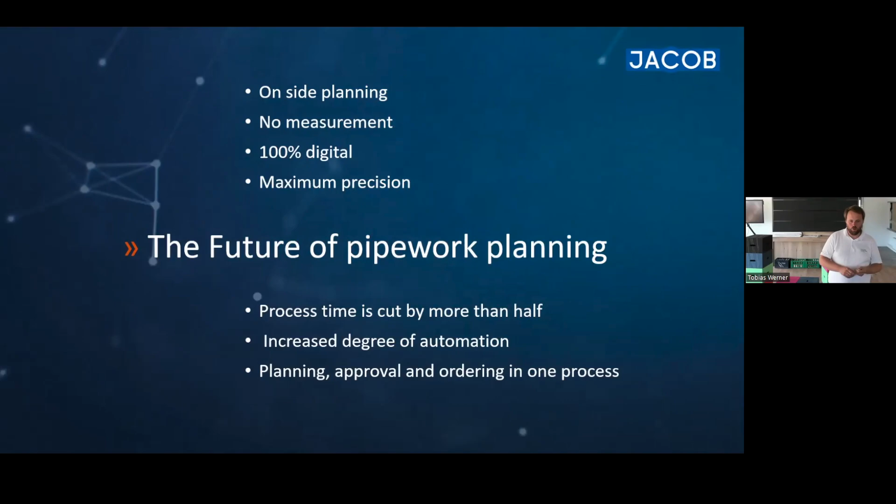And how we do it is, as mentioned, with the software we call Pipe Planner, which is an augmented reality software. To use it, you only need this device. I hope you can somewhat see it, and I guess most of you know it. It's a Microsoft HoloLens 2, AR glasses. And we don't need internet access. We don't really need additional knowledge regarding the technology. It's really easy to use and to learn. And it enables us to do the planning in the direct environment where the pipeline is later needed.

So let's take a glimpse at the new process. We could do smaller pipework in just a few hours. For example, you take the HoloLens or any other AR device, go on site to your customer, put on the HoloLens and start the planning where the pipework is needed. So you don't need any measurements, you don't need any 3D laser scanner. You can start planning directly with the parts from Jacob, exactly the same parts as you use in CAD.

And what is really interesting is you can hand over the HoloLens or show it on your computer screen, showing the customer where you planned it. Hey, dear customer, please take a look. Is that the pipe system you had in mind? And he can put on the glasses, walk through the room, walk 360 degrees around the pipe system, and really see, okay, this is what we could build, and I approve that. Please feel free to order it.

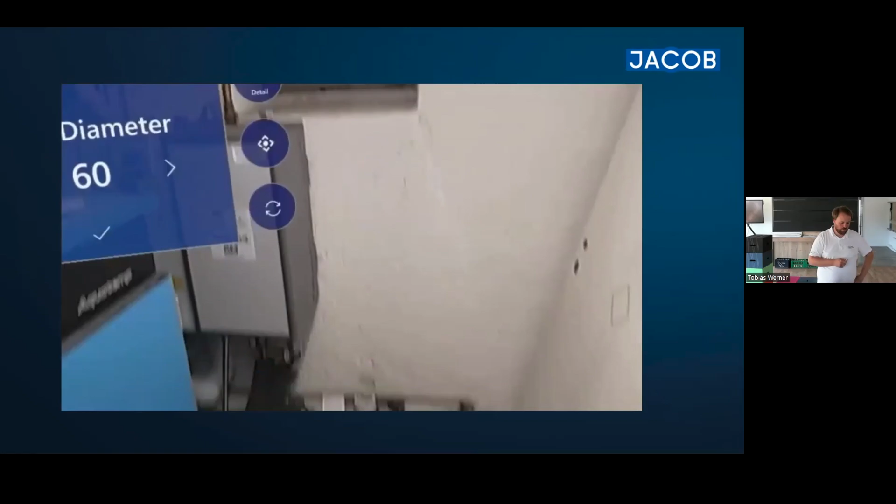It just was a nice environment to show shortly how in small areas with existing pipe systems you can start planning with our software. So this will start. Here you see he's wearing the glasses. You open the menu, then you have a starting point, which is a small blue point he's moving around.

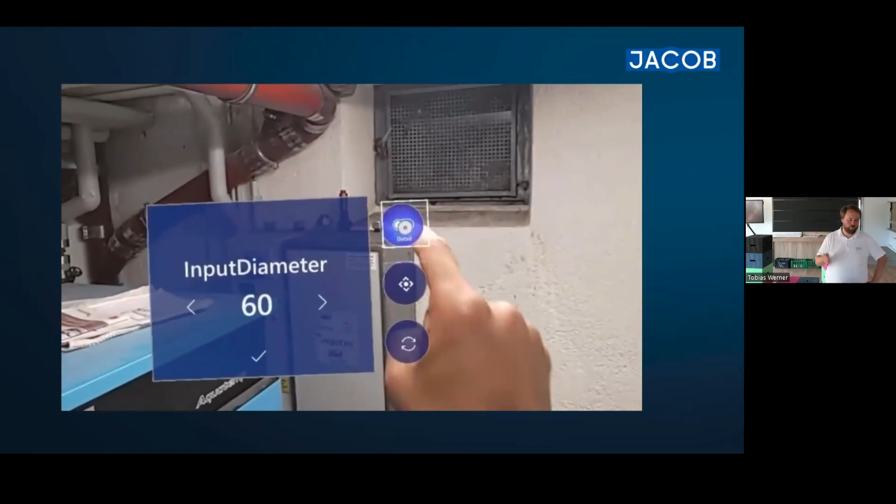And what we programmed it for, it is attaching to flat surfaces. For example, the ground, the ceiling, walls, the end of pipes, the end of machines. And here we see a pipe that is ending in the middle of the room, which we now want to keep on planning. And for that, we developed a tool to adjust the starting point wherever we need it.

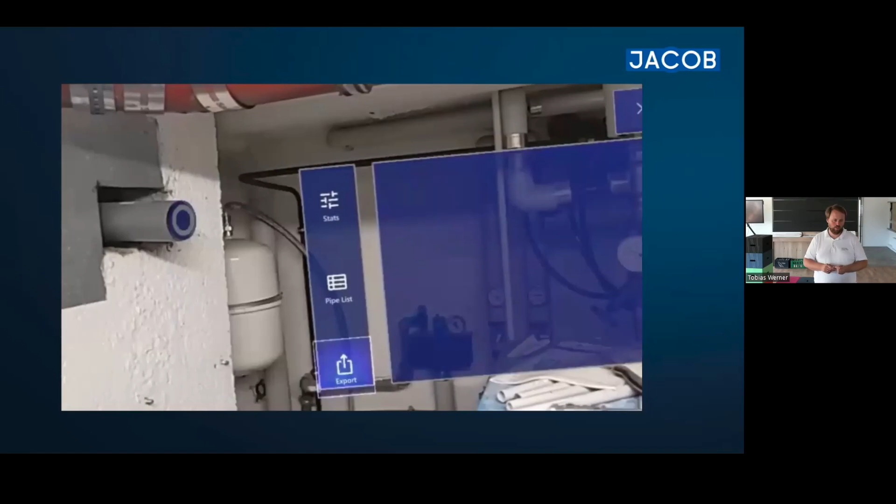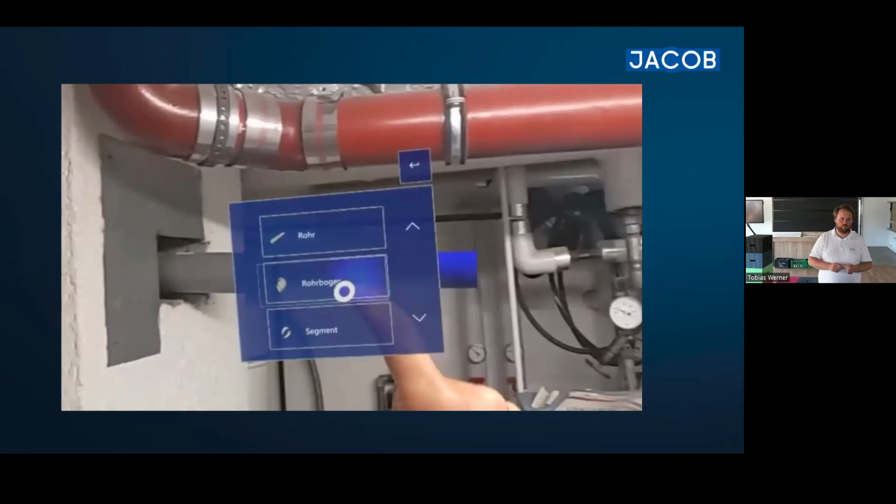So in the middle of the room, now you can choose the diameter you want, and now you just place pipe by pipe, like a Lego system, just by clicking your fingers through the pipe system. You can choose between every standard pipe Jacob has in the portfolio, rotate it, and as soon as you see the light blue dot there, you can click it.

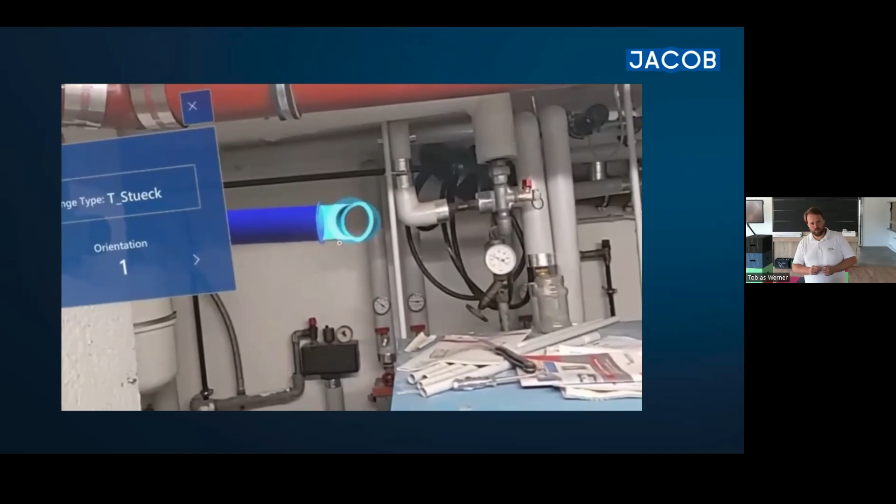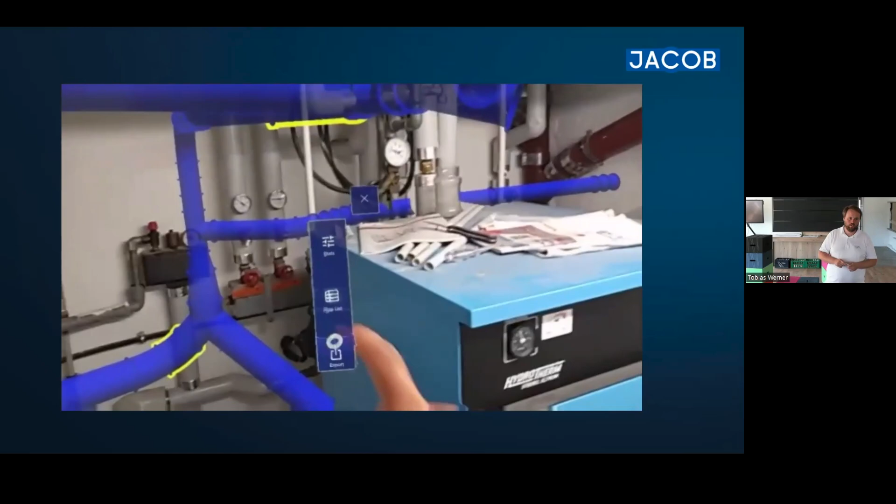You also can use bends, and you can rotate them, of course, because that's important. It's really easy. Just do it with the steering wheel. So you just place it where you want it, and continue from there. Exactly. And this is how you do all the planning. And as you can see, you can get as complex as you want. You have the live part list there, which you can check.

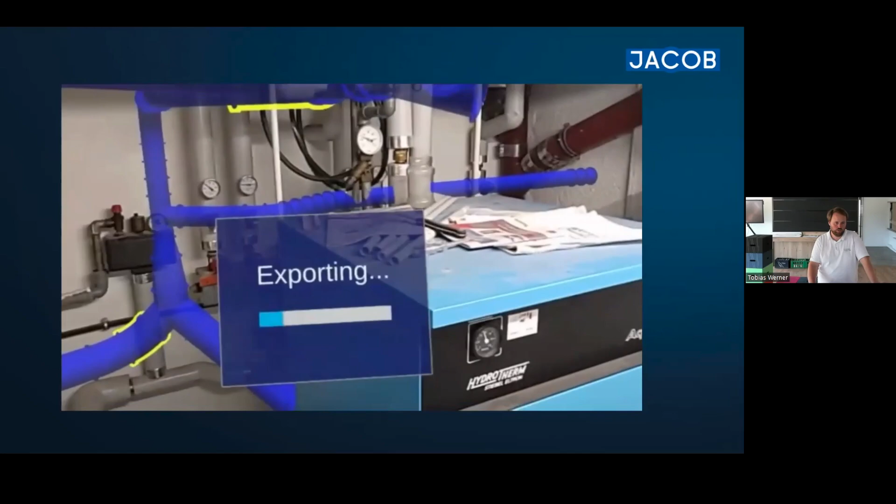And the main feature is that you can export it, save it locally on the device, and later on not only use the file in the CAD program, but also get the part list in a PDF format. Now you see Inventor, for which we developed a plugin. You choose the file you just saved, load it in, and it will automatically load everything in the right order as you planned it before with the AR device.

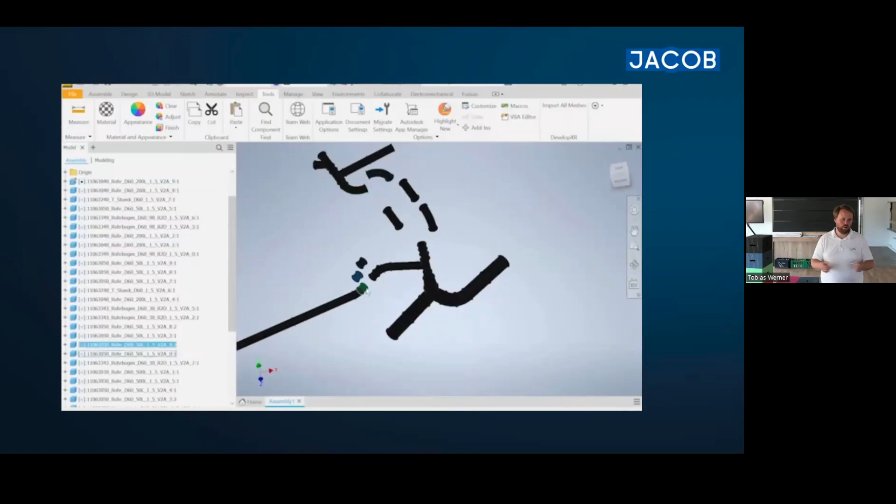And what is also really nice is that you now can manipulate everything. You can put it apart, you can add parts, you can change parts, just as you would do it normally in the, let's say, traditional planning way.

What are the advantages of the Pipe Planner? We have really fast planning. If you're a bit used to the software, maybe you see the dimension of the room where I'm in, you can easily plan a pipe system in like 10 minutes. Let's say like 200 meters in half an hour or something, even if it's complex. You see what you get.

Not only you see what you get, but also your customer can see what he gets. You can get the approval, you can see the collision. We also can turn on the collision control, which turns pipes that detect a collision red. So you see, okay, they have to twist it a bit or they have to change it. So all in one software, you have the planning, the collision check, the part list, the CAD documentation, and you can order all in one application.

You have the full control, as I mentioned. The collision check is there. You can see if everything around is considered. You also can, maybe if you place a new machine, do the piping, hand it to the later operator and see, hey, is it okay for you if the pipe goes this way? Is it fine for you? Do you reach the valve in an appropriate way? You have everything at a glance.